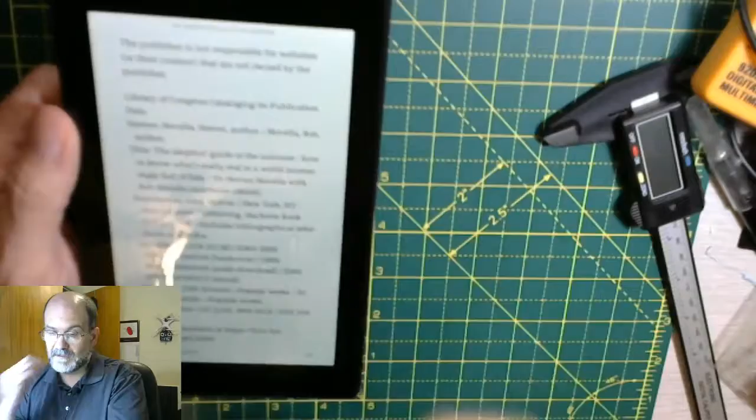So it displays pretty well. I don't know if I see that, but problem is there's these little side things, the bezels. I know it's weird when people try to get away without having bezels at all, but...

It'd be nice if the bezel was a little wider. Kind of like if we turn it this mode, you've got a lot of room on the side. So this is really designed for people to consume their Amazon videos and stuff like that. But since I want to use it for a book, I really want to use it in portrait mode. And problem is that the bezel's not too far, and just holding it in this position is usually like a book or something. If you can just wedge it in your hand, it's nice, but it will skip things, it'll scroll.

And so I had an idea that it'd be really nice if there was something I could put on here that just extends it a little further, so I could just kind of relax, wedge it in my hand, and then use it for reading for fairly long periods of time. But so anyway, that's when I said, why don't I design something.

I got a 3D printer. Let's see what we can do. And then I had the idea about way back - I made a cover for a little key fob thing, and I said, well, maybe I can make something similar.

So I wound up doing that, and here it is. I printed it using a brim. Usually I print using this is called a raft, and the raft's really nice - it gives you a smooth print and stuff, but it takes a lot of material. But the bigger problem is it takes a lot of time to print this. So if you don't have to print the whole raft, you can cut down a lot of time. I found they had a brim available, and I never used it before, so I thought, what the heck.

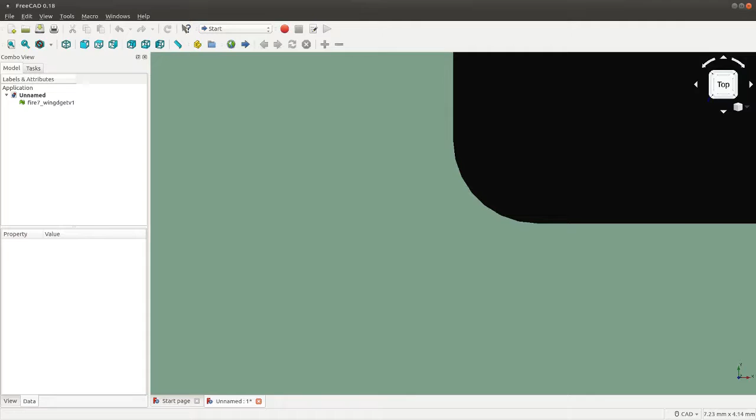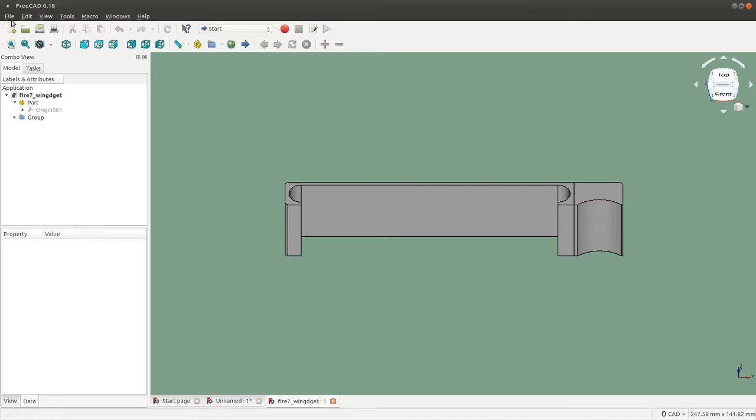So here's my finished drawing, and it's not really a drawing. What I did is I used an additive and subtractive technique. The first thing I did was make a box, so it was 115 plus, I figured about 1.5 millimeters on each side. Let me just click new.

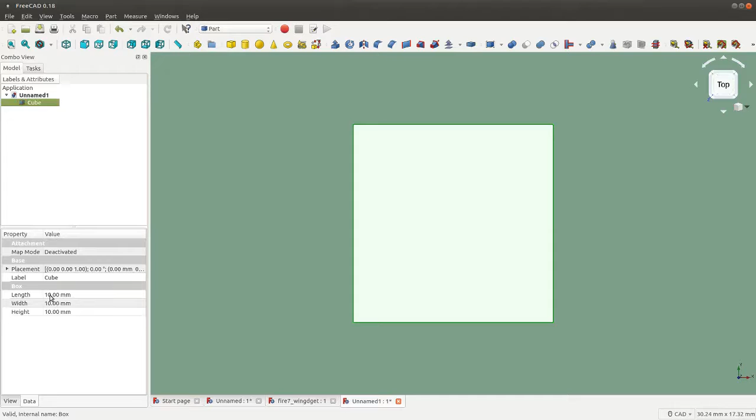We want part design, I think. So we have these items up across the top where you can add these primitives, using different parts we can add things to it, subtract, union, and so on. Let's go ahead and create a solid. It comes out with the cube, and we got a length of 100, or 10 millimeters. So I think I told you we want 118.

Let's zoom out a little bit, and 10 I think was fine, and then I decided somewhere around 30 millimeters, not 330. What's nice is I got this thing now, so you can actually rotate it and see different parts of your part, which really doesn't mean much on just a cube like that.

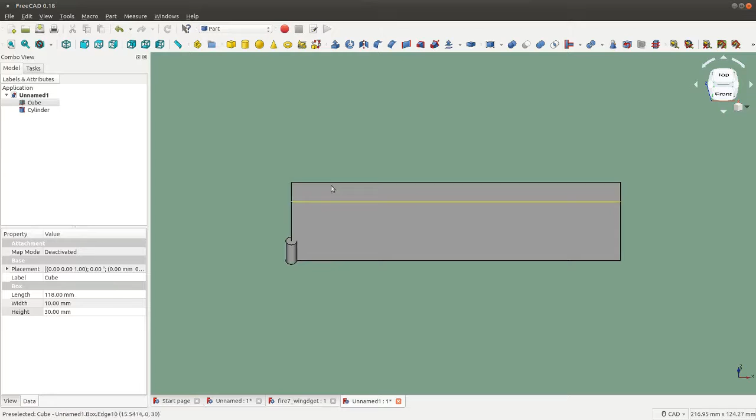So then I said, okay, well now I can see the top part. Now I need to add a cylinder, so we add a cylinder, and this will be the rounded edge. If you remember, I came out with 10 millimeters as the size, so we need half of that, a 5 millimeter radius.

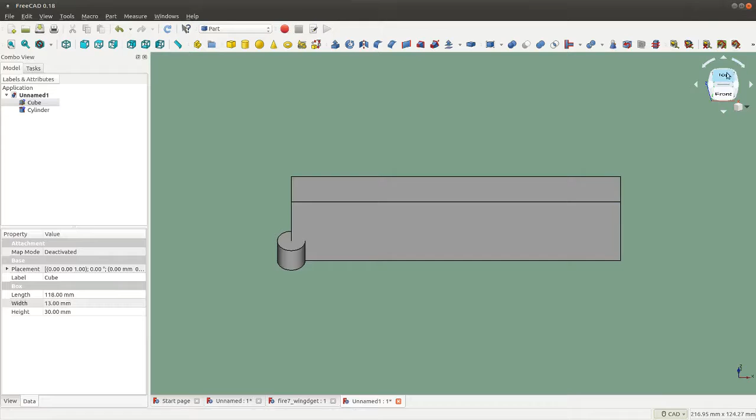Oh yeah, we need to go back to here, the cube, because width is not good enough. We need to have that extra 1.5 millimeters, that'll be 1.5 millimeter material around it. So this should be 100 or 13 millimeters. We'll go ahead and add that. Now if we go to the top, we can see that part there. We'll say okay, fine.

But now we need to move it, so we need to click into placement, then position, and we need to move this, which is at the end, 6.5 on the X, I believe. So minus 6.5, and then on the Y we need to move it.

See, minus the 6.5 -- whoa, not 65. Not 65, 6.5. And we can't see it because... oops, I just moved the whole wrong object. Let's move that back. Let's click on the cylinder, cylinder is the one we want to move.

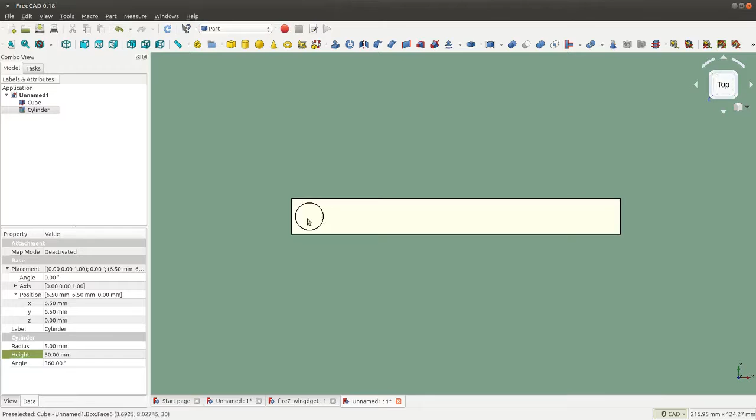So 6.5, so it isn't negative, it's 6.5. And then I think we want to go 6.5. Of course now we can't see it, so let's go ahead and make the height of our cylinder 30. Now it pops up right here. So now we have one end of our object.

And we need to create another cylinder, so we'll add another cylinder and do the same thing, except click on that cylinder, change our radius to 5, change our height to 30, and we're going to need to place this at the other end, and that should give us our position.

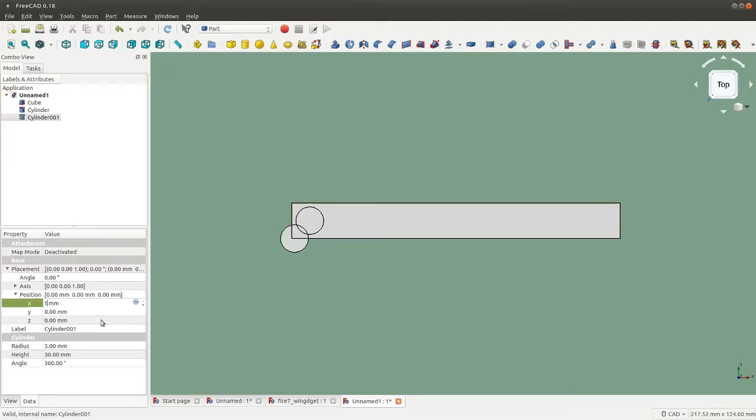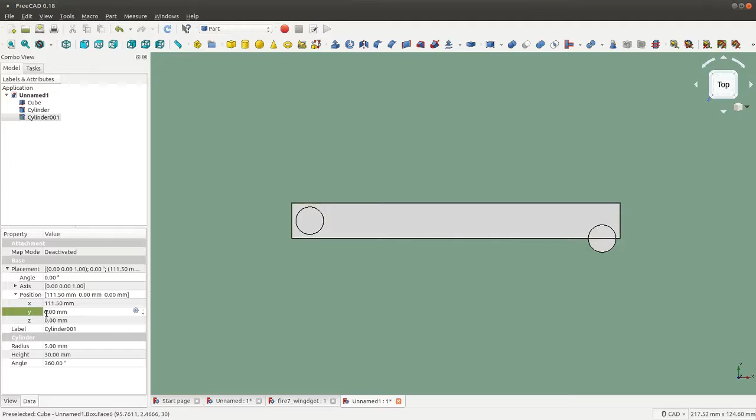And now we have to add another block, so let's add another block. And this cube, right away, let's bump that up to 30. We want the length to be from the center of one of these circles to the center of the other circle, so that should be 105, I think.

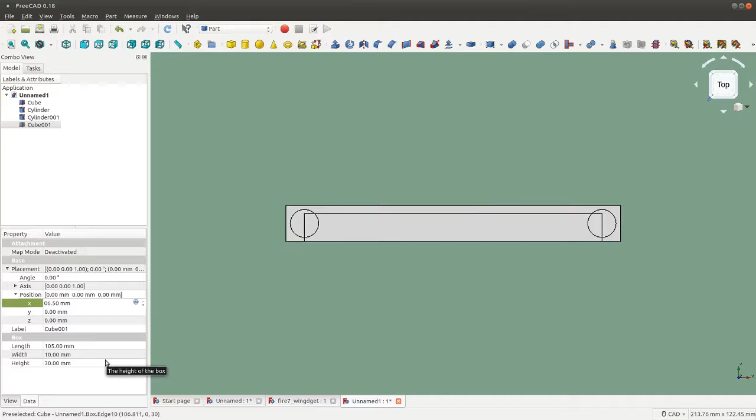105. And then we need to move it, the 5 plus the 1.5, so 6.5. 6.5. Oops. Now we're over, and we need to line it up this way again. 6.5. 6.5.

Oh, you don't need to move it that far, 1.5, because it was already lining up. So now we have something that's going to cut out the whole center part where the actual tablet will sit.

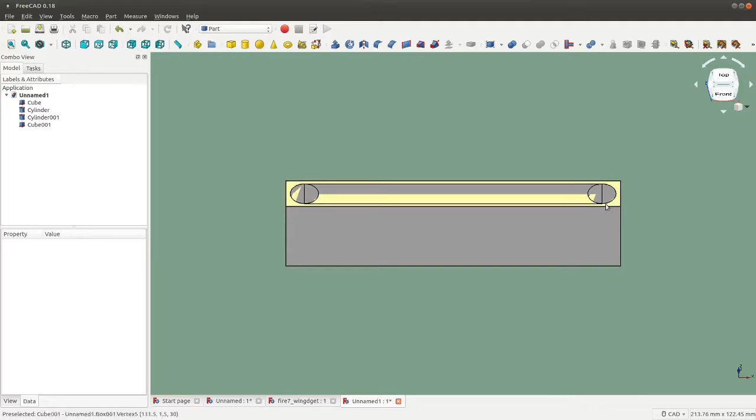And if we rotate this a little, you can see that this will be the front. So we'll need to have another thing that comes out and cuts another block, so we're going to add another block. Let's go ahead and add one more block.

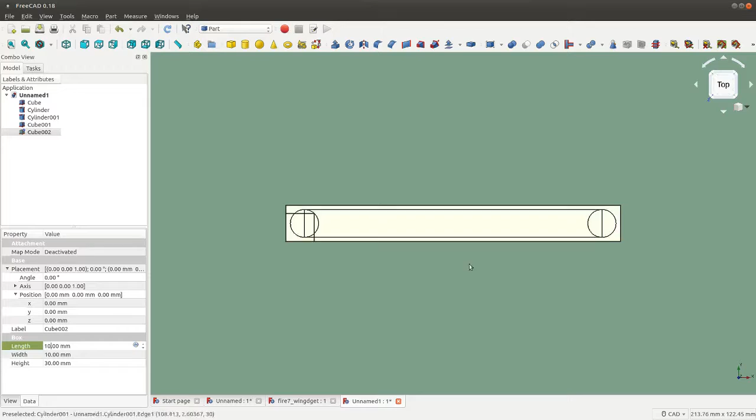Well, if we make it 105, then we can line it up with that, but I think we want to, we'll see. We'll position this. We don't need to move it up because we're going to want to overlap. In fact, let's go ahead and move it -1 millimeter so that'll hang down, and then we'll move this over 6.5. Woo! Dang, can't do that. So that lines up with that, but I don't think, for now let's just go ahead and leave that there.

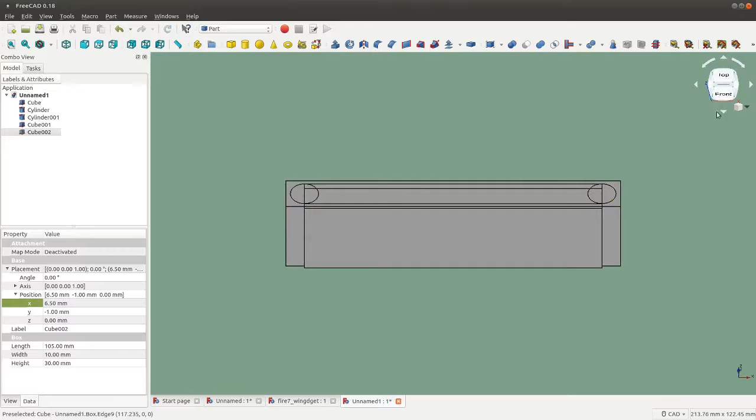So we've got all these things, and we still need to add another block, so let's go ahead and add one more block. The next block we're going to add is going to be the part where the thumb sits. Let's go ahead and add another block. That's this cube, height 30.

Length, I figured it would be about, let's just go ahead and make it 25. And oh yeah, length 25, and whoops, and width of 10, so we should be good. No, we want 13 to match up with the other one.

So now it should match up there, but now we have to do the placement. We know this is 118, so we need to position this at 118. Boom, it's right there. Now we need to do the cutout for the thumb.

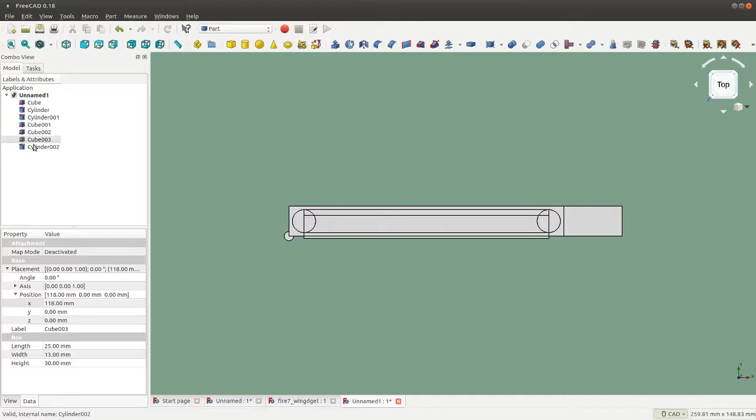So we'll add another cylinder. Click on that cylinder, we'll make this one a pretty good size radius. Let's try 45 for now. Might be too big, but we're going to go ahead and then now try to position it.

So we're going to just move this over 60. Okay, 90. Okay, 100. Okay, 120. Okay, 130, that might be it. So let's go ahead and move it down, you can use these little drop downs and just.

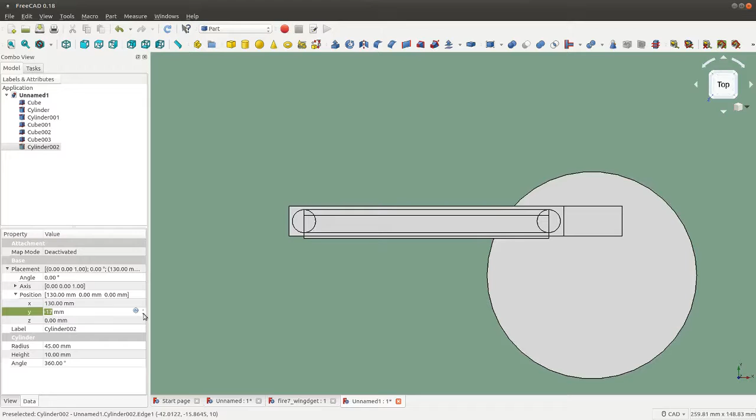We might have to change the radius because it depends on how. Yeah, see that? Let me make this height 30. And so now we can see it's not really cutting in that great. Let's go ahead and see if we can change this to, let's go ahead and make it 30, and then we'll have to move it up again.

And let's go -26, 20. Let's go 27.5, and we'll bump.

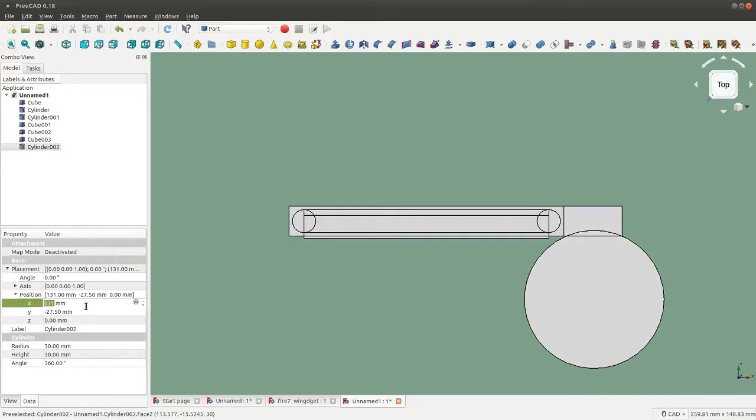So now we got a nice little groove there. Probably 130.5. Yeah, that'll be good.

So now we basically have all the pieces parts we need to start using these Boolean operations. So we're going to start off with our main block.

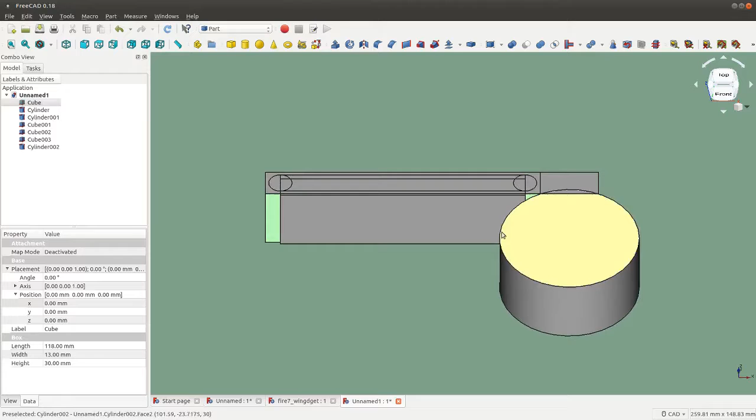So we'll start off with cube, and we're going to go ahead and Boolean that. We're going to use the first cylinder, which should be this one, and we're going to go ahead and do a difference, and apply. So now we have a hole right there.

So we close that, and now we take our cut here, which is the result of our previous one. We're going to keep adding our process to that. So now we need to take this cut, do a Boolean operation on that, which is the cut, and then we can take our next cylinder that we added, do another difference, and apply that.

And that didn't work. Why? Or did it? It's hard to tell. Let's go look at the top. No, doesn't look like it did it.

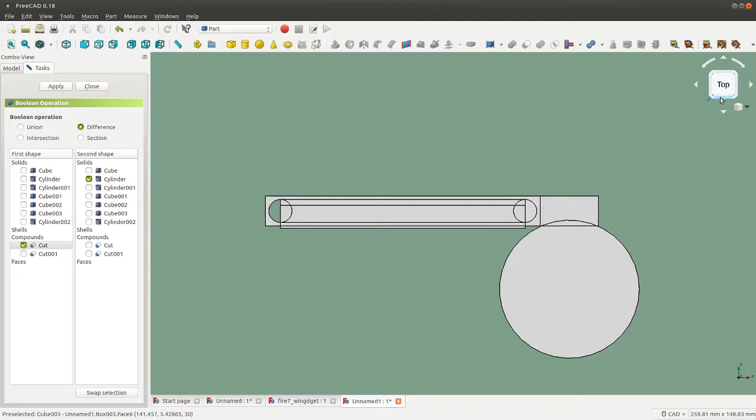The cut cylinder. Oh, we just cut the same cylinder out. That's not going to work.

So let's Control Z. Now we're back to a cut. Let's go ahead and do this again, but we need cylinder 1, I think. So let's apply. Yeah, now we got it. Okay, so now we close that.

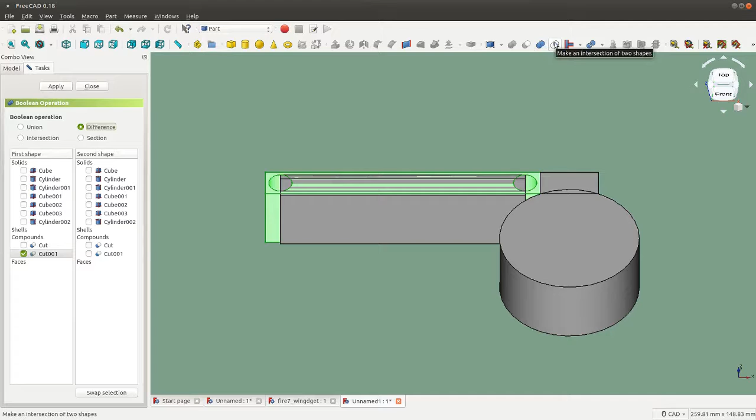Now we can work on this cut, which is the block and the 2 cylinders, and let's go ahead and remove the cube 1, and we'll go ahead and Boolean that, switch over to difference, which I'm sure we could probably just click that button. Oh no, it's the intersection.

So we got a cut. We'll take out the next cube, in which case this will be cube 1. We'll apply. If we go to top, we'll see that that just cut that out. Let's go ahead and close that.

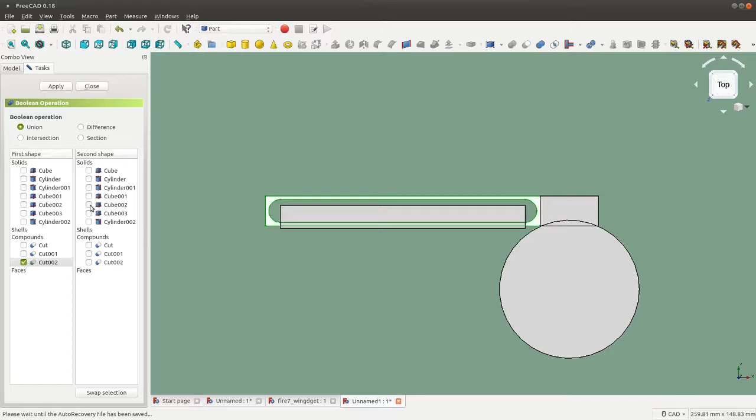And we got our cut 2. We want to do cube 2, which would be this one here, and difference, apply, boom. So now we have that done.

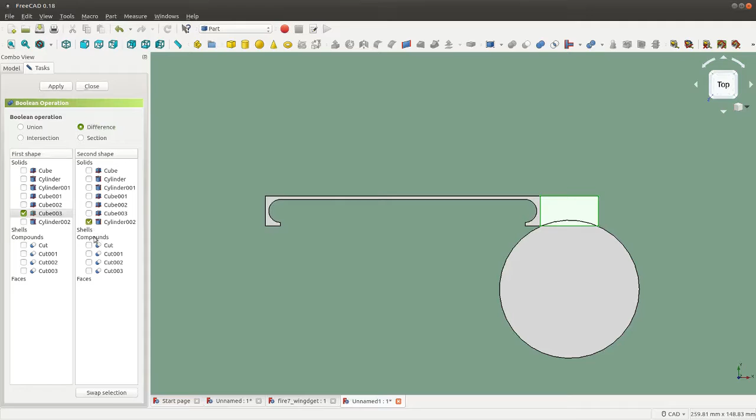The last thing we have to do is this block and this cylinder. So we should be able to take this cube, difference in this cylinder, apply. So now we have a part that looks like the one I printed,

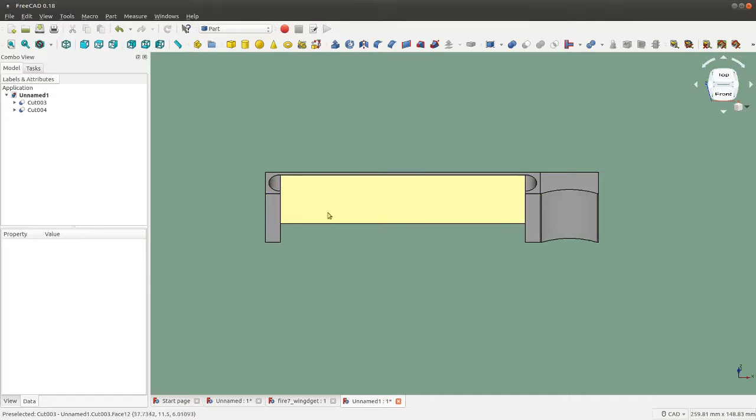except we then want to apply a fillet on some of these edges. So let's go ahead and click that edge, click that, and here you can change your, I probably should try 2. Yeah, that makes it smoother.

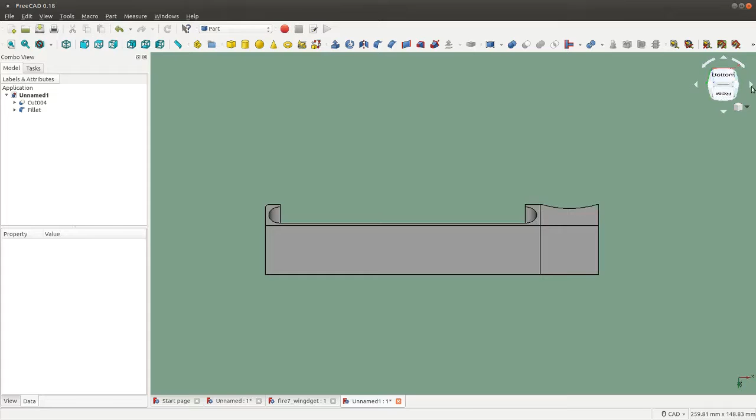So let's, and this is where it's nice in that we can now, before earlier versions you could only get certain views, so this nice little die-like rotate view here can at least get you to the parts. It's not, you know, like you can move it freely as a 3D object, but at least you can get to these edges now.

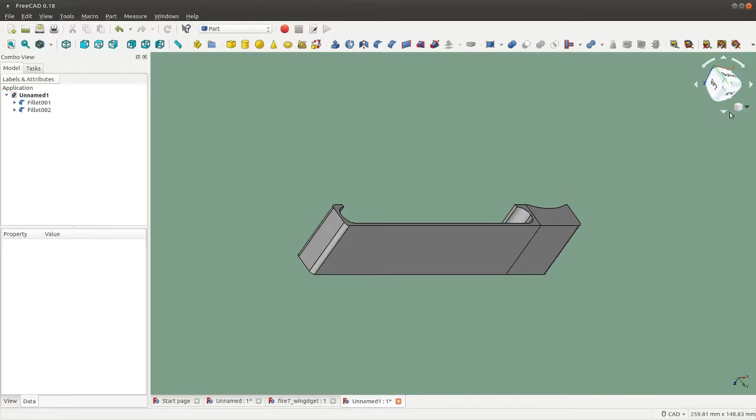And then let's make this one a 2 also, boom, take that edge, do that, make this one 2 also, and so yeah, we now have a part that we can then print. So once you get to that point,

can then do an export. I use STL because that's what the Cura software seems to work with. At least I haven't tried anything else. It works with it, so I'm not gonna try.

Where is it? Oh, it's one of these. I thought it was down here. SCAD. There it is. STL mesh.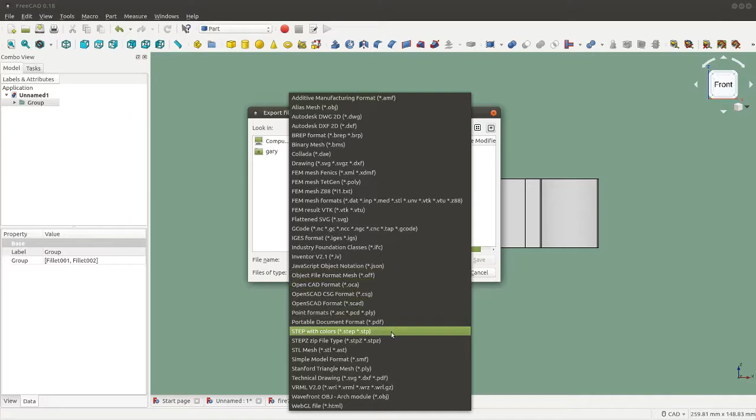And then you can, we'll call this version 2. Wham.

Then we can go ahead and I'm going to go ahead and open up Cura. And it should be coming up shortly. If my double click, yeah, here it comes.

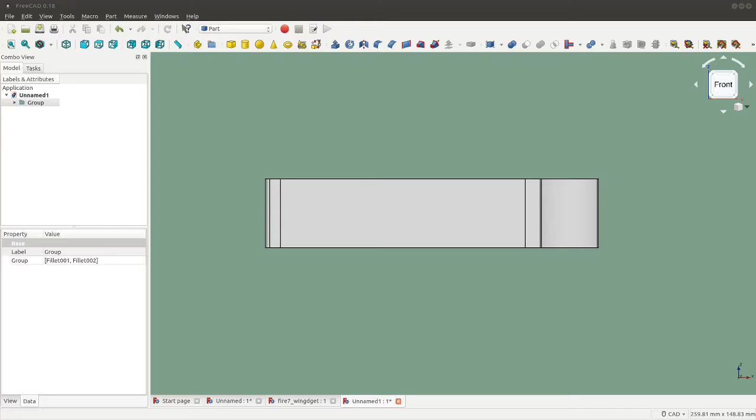Pretty sure there's a newer version. It came out with a message saying there's a newer version of this, but I found that, you know, my printer didn't really change.

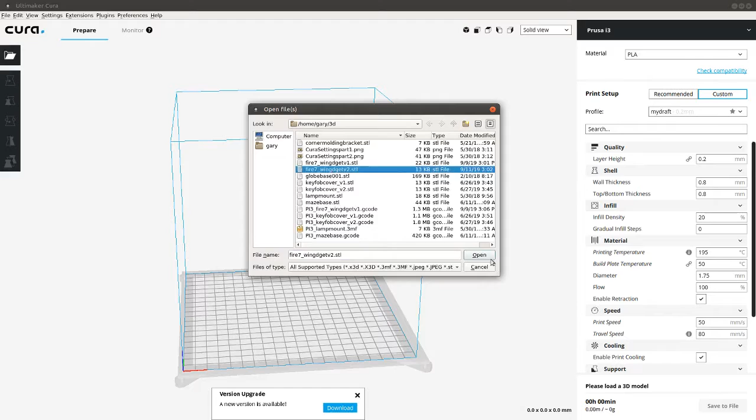So at this point, we can go ahead and open a file. We put it in. Here's our version 2. You can open it. And so we got an hour and 26 minutes, which is as long as it took me to print it.

And I think, yeah, Brim. Before I was using Raft, I decided to use Brim. Whoops. Yeah, Brim. I just clicked that button and it just expanded that.

It confused me. So that's, you know, then you save that file out, saved file, and boom, put it in the printer and print one out.

So at this point, I think I show you a time sped up version of the print, and that's it. It all works pretty good.

So a little FreeCAD and how to make a little widget, I don't know, whatever. It's just a little thing that, you know, should make it a little more comfortable reading the tablet. So I guess we'll call that, stick a fork in it and call it done. Catch you later.